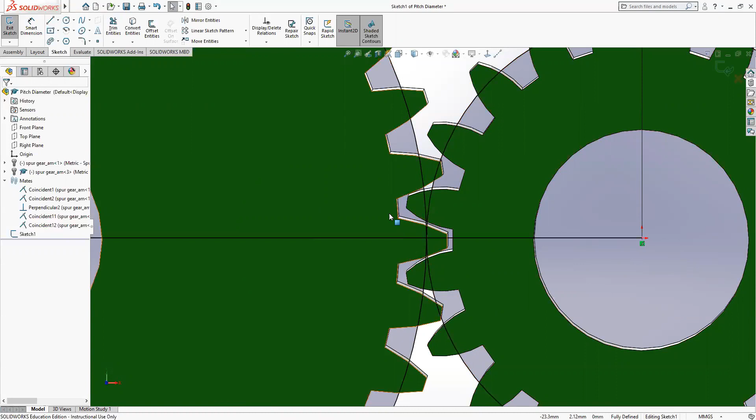And if you zoom in here, you can see that these two circles are tangent to each other. And you could also see that as the gear was spinning, the tip of your gear never impacts the root of the other gear. There's always a space in here, and basically this lets the gears spin without binding.

So when I say module and tooth number, we'll get out of this edit sketch, back out of here, and we can right click on this little gear and go to the edit toolbox component. I've already brought these gears in from the toolbox. Remember, you can go to toolbox, we're dealing with metric, so you go to the metric drop down under power transmission and then gears. That's where you can bring in your gears.

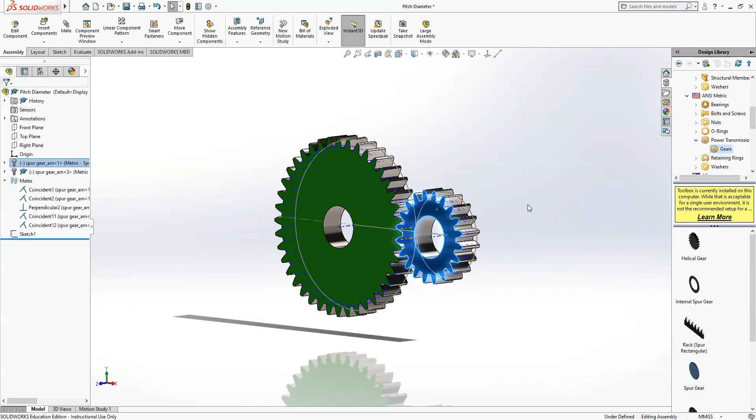And these are basic spur gears. That means that the tooth pattern has no angle that the tooth is rotated at or anything like that. They're coming straight out, 90-degree angle out from the body of the gear. If we spin around here, you can see there's no weird pitch to them this way or anything. They're a standard spur gear that comes out from the center and radiates all the way around.

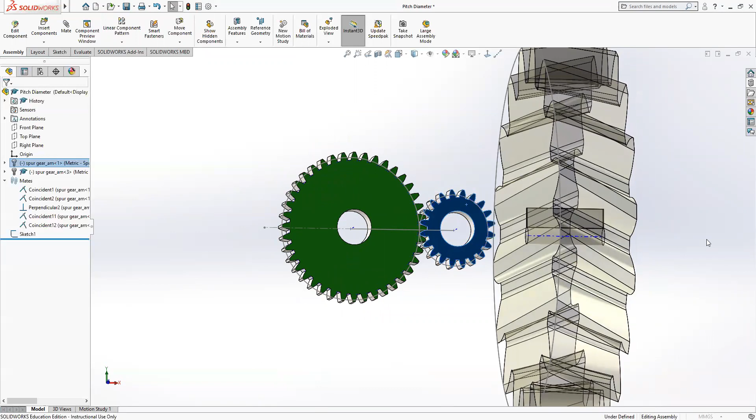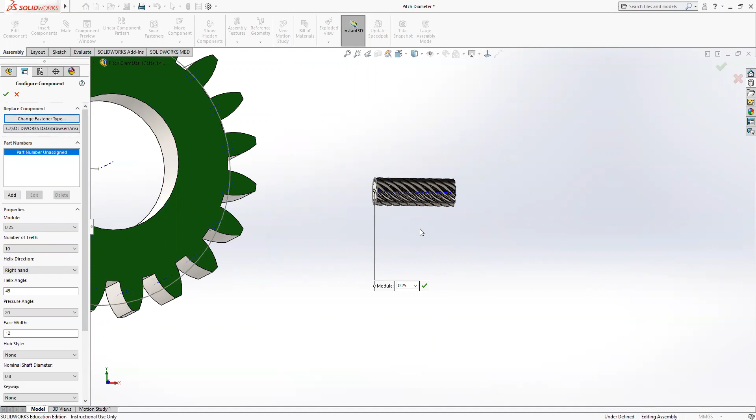When I say it might have some sort of weird pitch to it, let me just pull in a helical gear real quick so you can see it. We'll zoom out, let me click off of it, we'll zoom in on it. You can see a helical gear, the teeth are spiraled around the shaft. That's what I meant by a helical gear. That's kind of a different beast, though it still has a similar setup when you're matching it with other types of gears. You want to make sure your module is the same.

So anyway, we'll exit out of that, go back to this. We're going to look at just these basic spur gears for right now. We'll go normal to our front plane. All right, so we've got the small spur gear here.

So if I right click on this and edit the toolbox component, because we already brought it in, right? In here, this is a screen that you would see if you brought in a brand new spur gear. And to come in, it would have what the part is, and then you would have some properties here. The first property is the module.

And like I said, that's the value that if you multiply it times the number of teeth, it's going to give you your diameter for your pitch, right? So if we go in here, we can change some of this, and you can see what happens. Say we go to that, you can see we went to 2.5.

So now we're 2.5 times the 20 teeth, and our gear got bigger, right? And you can also see, if you were to imagine these meshed up, this tooth isn't going to fit in between these teeth very well. If I was to go and make this gear a module 2.5, then the teeth would mesh, but we'd have to change the distance between our centers, because we have 20 teeth here at 2.5.

That gives us, for our overall diameter, it's going to be 50 then, right? Because 2.5 times 20 is going to be 50. So, which means if we were to do the same thing to this one, then we'd have to increase this distance from our center point to our center point.

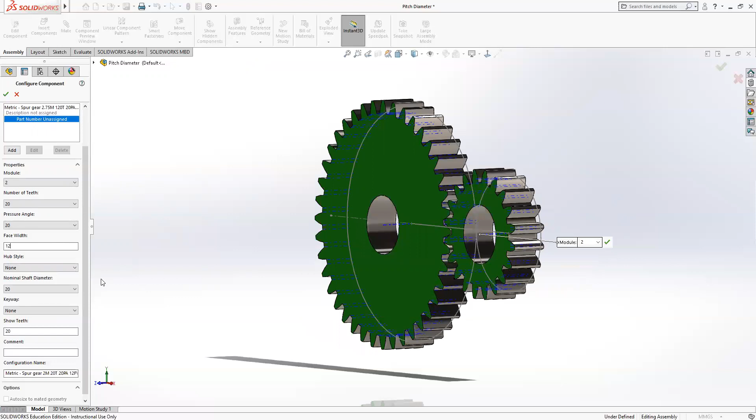And then we'll spin it around flat so you can see again. You have your shaft diameter, so that's the shaft that's going to go into the inside of the gear. Currently it's 20. Let's go a little smaller since this is a small gear anyway. Let's go 15. You see that made that shaft smaller. So it's 15 millimeters for the diameter of the shaft.

Let's go back to 20, and just keep everything kind of the same as what it was. And then you have the option of putting a keyway in here. A keyway is a way that you can lock that gear to a shaft.

So here's a square keyway. You can imagine that the shaft would come through and would have a similar notch in it, and you would have a piece of metal that fit into both those notches to lock it. Or the shaft would actually have this keyway as an integral part of that shaft. So it would be round all the way around, and then it would have this square part that's stuck out of it. And when the gear slipped onto that shaft, that would keep the gear from spinning free on the shaft. It would hold it in place.

For right now, we're going to just go back to none as well. Okay, and then the final thing that we can look at is you might not have a gear that needs to be around. You may only need 10 teeth on that gear. And of course, it flipped it that way because why not?

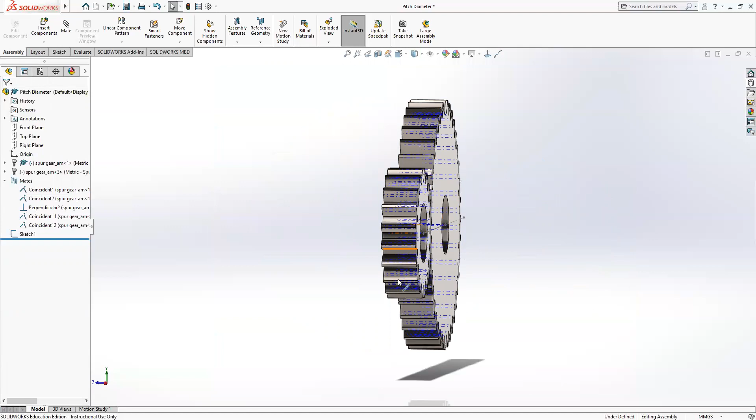And then I did the same thing with the big gear, I took the face of the big gear and mated it to the front plane. That made them so they both line up flat together along with the front plane. You can see the front plane there.

I drew in a line that was the distance that I wanted between the two center points. And I did a coincident with the center axle or the center axis of the small gear. This happens to be the origin, but it's one point at the end of the line.

And I did the same thing with this one, where I have the center axis and the end point of that line. That keeps it so even though it's flat on that front plane, it can't go up and down or left and right. It stays where it's at.

This perpendicular one is actually not necessary. I was messing around with a few things, and this one we can go in and delete it. It does not actually do anything anymore.

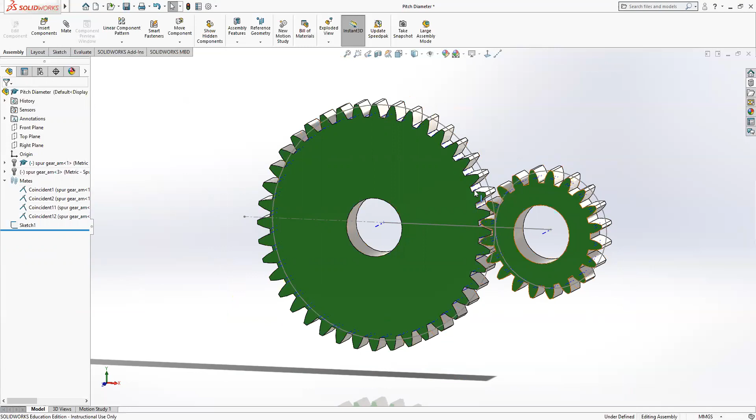It makes it overdefined. So basically with those 4 mates, and those are just general mates, we're able to align these gears and get them set up in a position where they're in the right relationship to each other.

Now the one thing you want to make sure before you do this next step is you want to zoom in here and go normal to our front plane, so we're looking at everything straight on. You want to make sure that the gears aren't overlapped with each other at all.

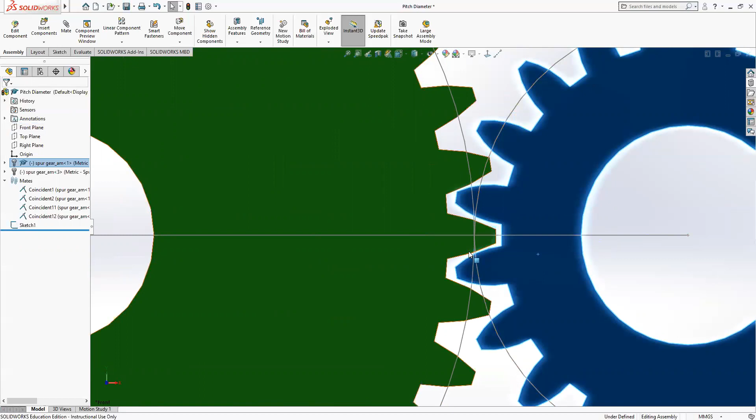So say in this case, if it looked like that, you'd want to come down here and spin it so that they weren't touching each other. All right, so we'll click off of that. We want to go to assembly and we want to do a mate.

Now what we want to do is go down to these mechanical mates. In the mechanical mates, we have a few things: cams, slots, hinges, gears, which we're going to use, rack and pinion, which is basically a different setup of gear — it takes a circular motion and turns it into a linear motion — screws, and a universal joint.

So we're going to do a gear mate here. What you want to do is spin across here. You want to choose the inside of your gear, and the inside of our gear.

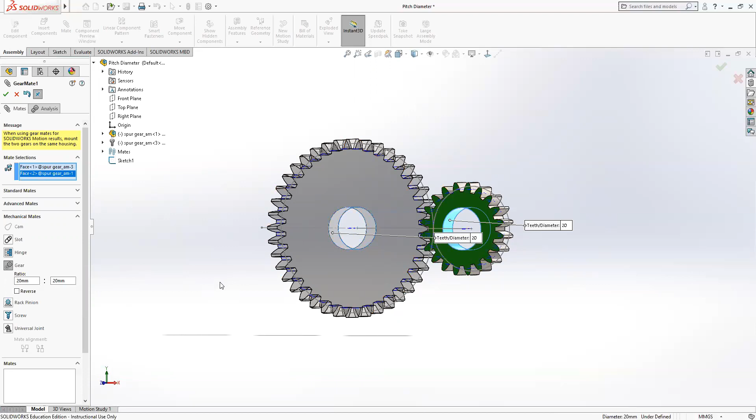All right, and it's asking for a gear ratio. So we chose our big one first, so that's going to be the first number here. And then this other one is our small one, right?

So what we want to do is it's either got your teeth or your diameter. We know that we have 40 teeth on here, right? We also know that our pitch diameter, you can use pitch diameter as well — basically, as long as the ratio is correct, this will work. So our pitch diameter is 80, and our pitch diameter on this one was 40, right?

Because we're module 2, we have 20 teeth and 40 teeth, so let's just go with that. We'll put it in here, we'll put 80, and then this one we'll put 40. And we'll say enter. All right.

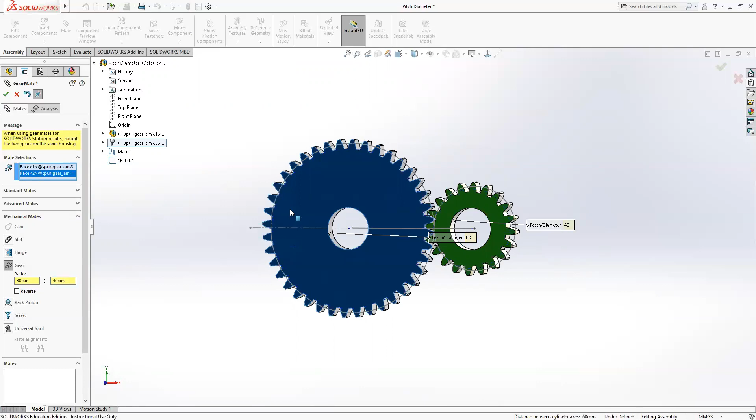And we should be good there. So we can spin it a little bit and see how it looks before we get out of the mate. That looks good, all right. So then we say okay, and we say okay again.

So if we go normal to the front plane again, we can look at this, and here we go. As this spins, you can see that your gear's tooth never impacts the far end of the root. And as it moves across, it pushes the other gear down.

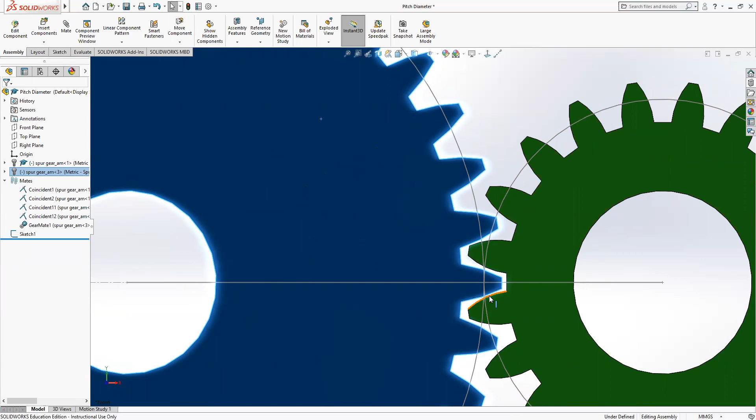And if you wanted this to be just a little bit more detailed when you were doing this assembly, you could have slid them up so that these two lines were just barely touching. Because right now, as I spin this gear—hold on a second—but as I spin these gears, you can see that there's a little bit of an air gap in there.

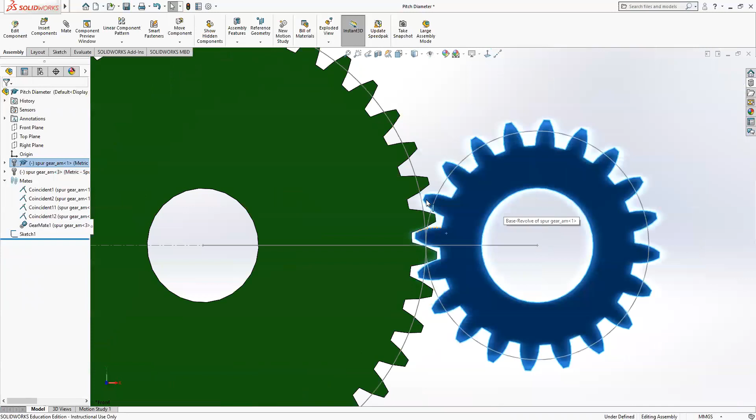And that just happens to be the way these gears lined up when I set them. It's not necessarily imitating a mechanical feature where you have a contact point there. You just set it up as two gears and gave them the ratio, so they know that if this gear spins at a certain speed, this gear is going to have to spin at twice that speed.

Same thing if you were going the other way—if you were putting the motor to this one, it would spin at, say, 1 revolution per 10 seconds. This bigger gear would spin at half a revolution per 10 seconds. So that's how you set that up.

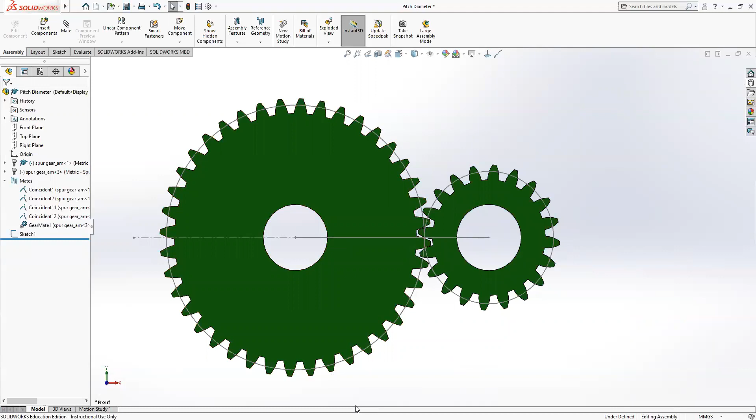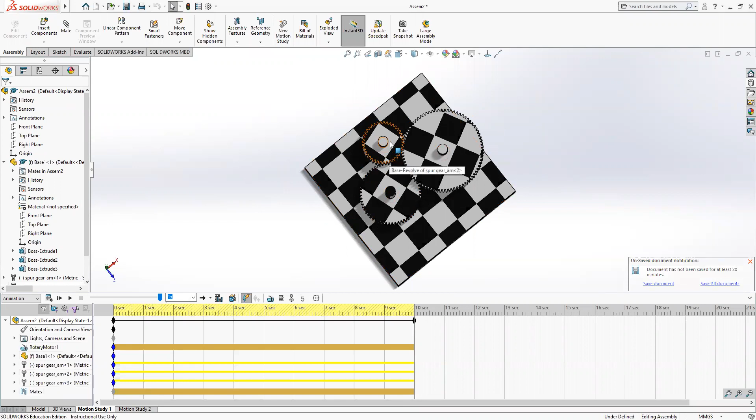And I have another diagram here that I can show you guys, another model that kind of explains that. So if you look at this, we'll go to the first motion study I set up. This is not 100% what I wanted—I had some different textures on here. Hold on a second and I'll put those back.

Okay, so I went in and changed some of the textures here. The checker pattern made it kind of hard to see, so I adjusted that, and then when I clicked back on something it had actually pulled those off. So we have a little bit of different texture here now, so you can visualize the spinning.

So in this motion study 1, what I did is set a motor up, and you can see here, if I go to the rotary motor and click on it, we can go to edit feature. It's a rotary motor, it's got a speed of 10 rotations per minute, and it's applied to this little gear, okay?

So if we go in here and click play, you can see that we have this gear spinning at 10 rotations per minute. Let me actually expand the time out up to, maybe, 12 seconds. All right, so you can see it's spinning—a little choppy here because it's doing its progression.

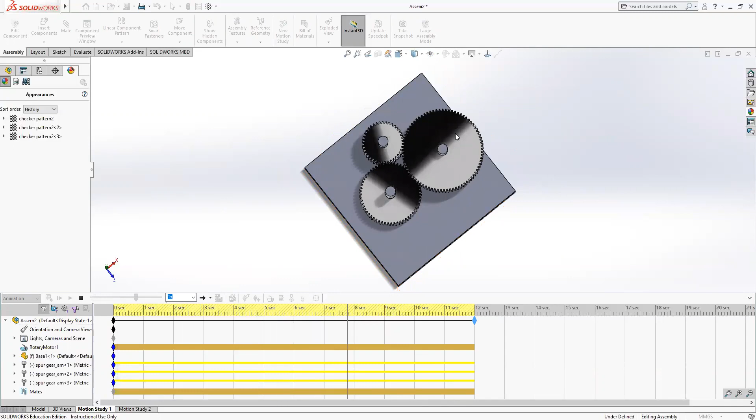If we play it from the beginning now—all right, so we're spinning relatively slow here, right? 10 rotations per minute. But over here on this gear, it's spinning even slower, and this medium-sized gear spins a little bit faster than the big gear. I'll play that again one last time.

All right, and this is what I was talking about, where your ratio here—for every time this one spins, it spins this other one a certain other percentage. And we can go in here and look at this little gear.

If we go into edit toolbox component, we see that it's a module 2—they're all going to be module 2. It has 40 teeth, okay?

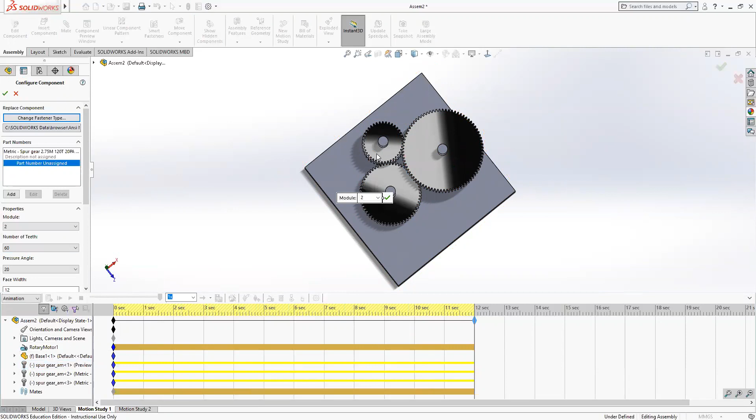This medium-sized gear—we'll go in here and look, it's got 60 teeth, so it's 1.5 times the smaller gear, right? And then our large gear has got 80 teeth.

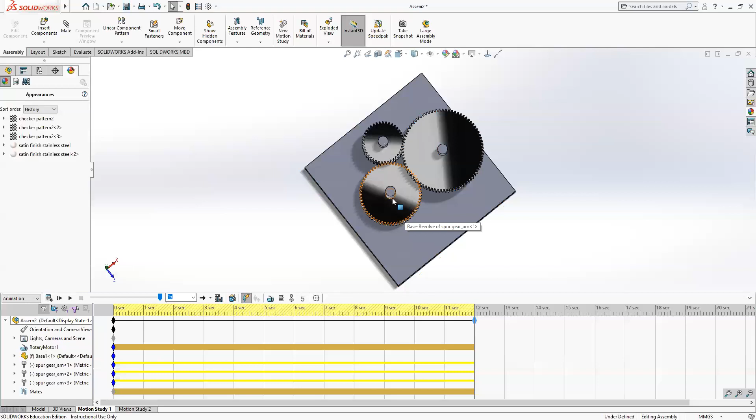So let's watch that one again, and you can see this—this gear is going a little faster, this one's going pretty slow, right? And you can see by paying attention to the line.

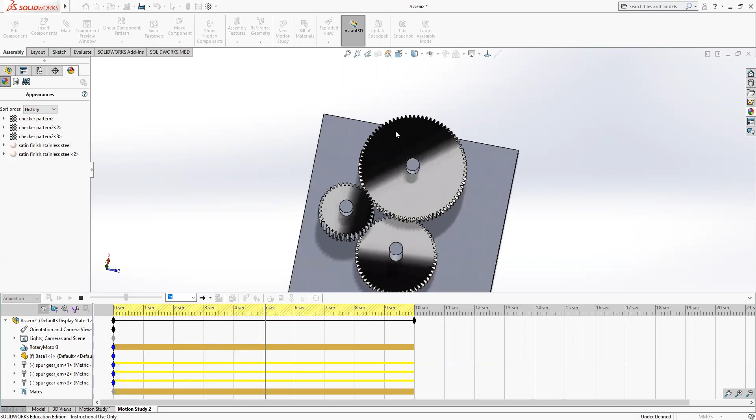All right, so in the second motion study, what I did, let's zoom in a little bit here so we can see it and get a better perspective. As soon as I click play it's going to zoom all the way out again, but we'll zoom back in. You can see here that instead of putting the motor on this little gear, I put it on this big gear.

So now this big gear, if we look at our motor features, has a motor driving it at 10 rotations per minute. But now, for every rotation of this gear, we're getting 2 rotations of this gear, and 1 1/3 rotations of this medium-sized gear.

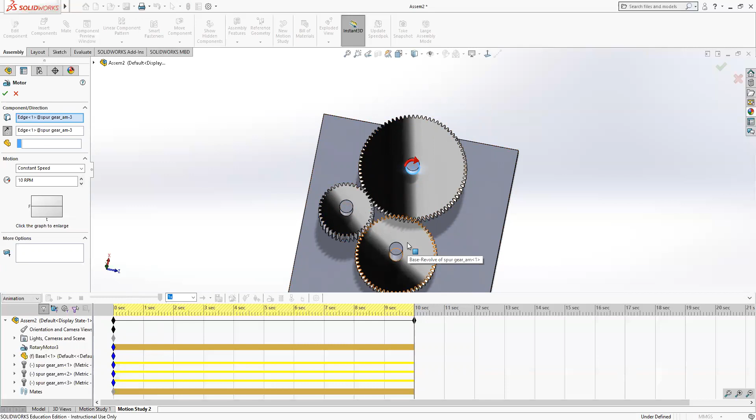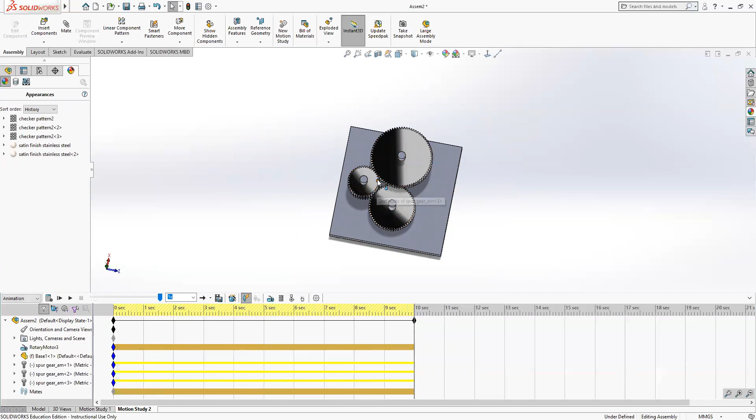So watch that again. When you're setting these things up, if you're going for an end result, you need to make sure you get your gear rotations correct when doing your gear mating. But also, when driving these systems, if you want a certain speed, you need to make sure your speed association in the motion study is tied to the correct gear, because that changes how all your other speeds relate.

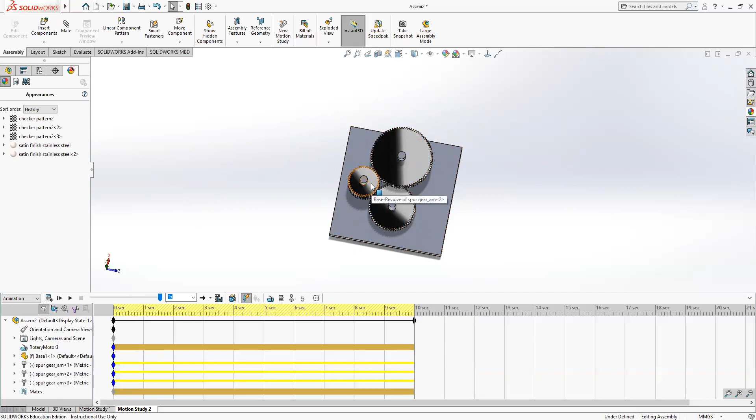So when we do the homework for this, I'm going to have you guys set up a few gears onto a plate. As you saw in the first example, you don't need a whole plate for this—you just need something to give the gears a rotational relationship to each other, so that when you spin them, they don't go all wonky on you.

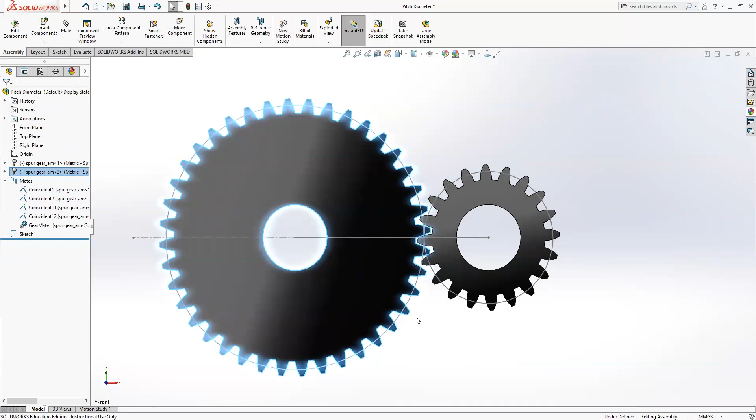Because if you didn't do that, the gears would start to—as you spun them, especially by hand—once set up in the motion study, it'd be different. But when you're spinning them by hand, when they're free floating, if they don't have any relationship to each other, they'd get out of alignment. So by doing your mates, mating them to the same plane and getting the relationship correct, you don't have to worry about that as much. Then you don't have that same problem.

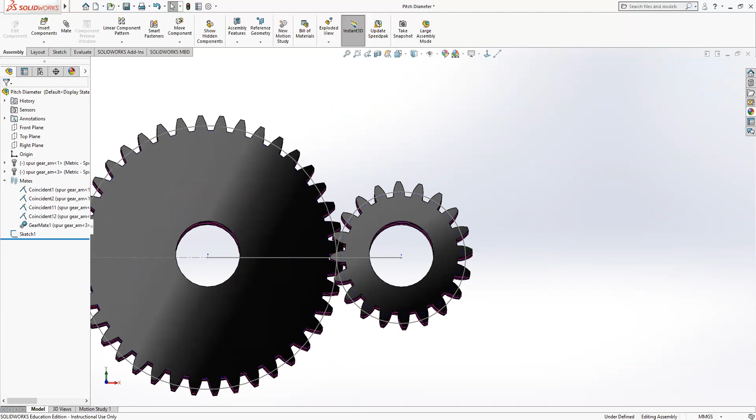This is just a hypothetical. If you were putting something into an assembly, this plate would be something you'd potentially have in that assembly, and each one of these pins would carry these gears.

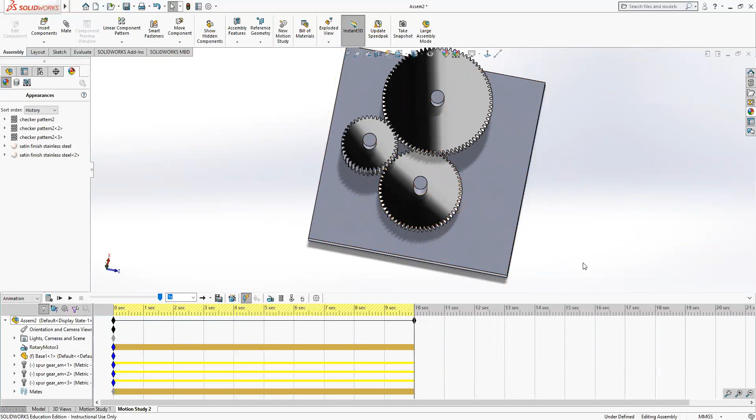I'll have you set up something—I'll probably have you make a plate. Keep in mind, when doing this, I won't give you all the values. I might tell you what your module for your gears needs to be but not how many teeth you need, and instead give you the distance from this point to this point. Or I might do it the other way around, telling you how many teeth you have but not the distance. So you'll have to think about that when doing the assignment and figure out how to fix it so those distances are correct, so you have your pitch diameter correctly.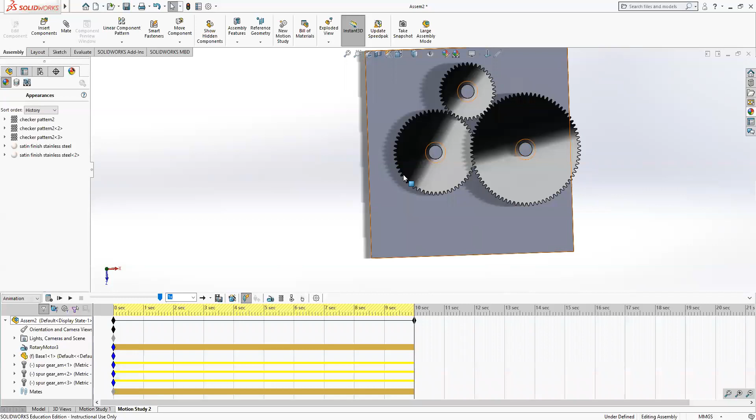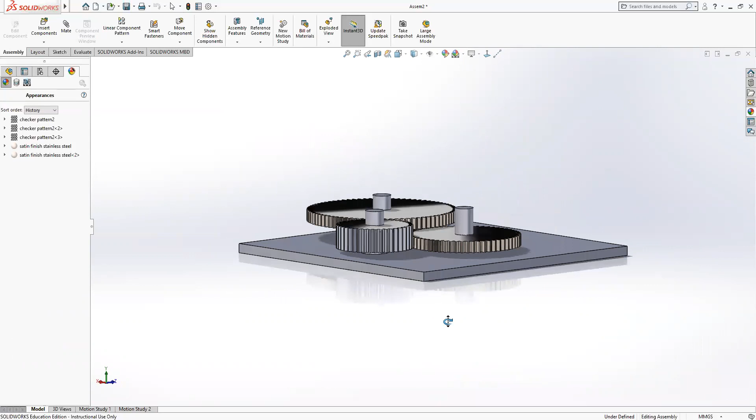Do you remember when I said I messed around a little with the gear width to make this part work? The way I did that—if you look at this from the side—I actually stacked my gears. This gear with 60 teeth sits below the gear with 80 teeth, and both are connected to this gear with 40 teeth. To do that, I made the 40-tooth gear twice as wide, so you have contact along both points.

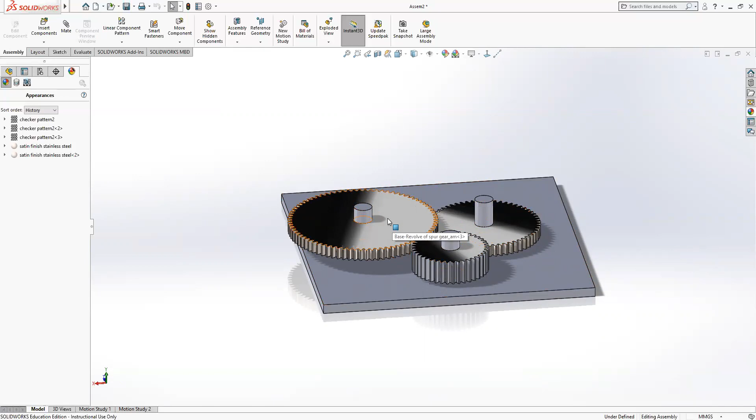If you're driving this gear, it's just going to drive both of them. But say this gear is driven instead, then it drives this one, and this one drives that one. That's one way to do that. In some cases you may see gears stacked on top of each other, connected, with a smaller gear inside and another gear sitting on top that contacts that smaller gear. Every rotation here gives less rotation on the little one, giving a different rotation to the other gear. That's how you'd make a speed reducer or a speed-increasing gear set.

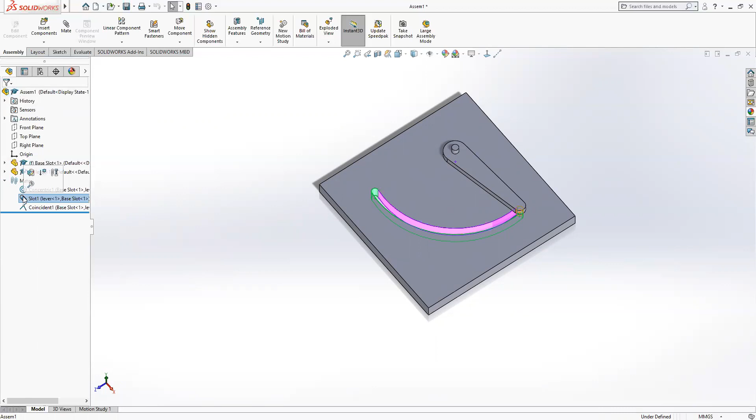This is two pieces. Remember when we had the mechanical mates, one of the mate options is slot. In slot, you can choose two faces: the face of the slot and the face of a pin that rides in that slot.

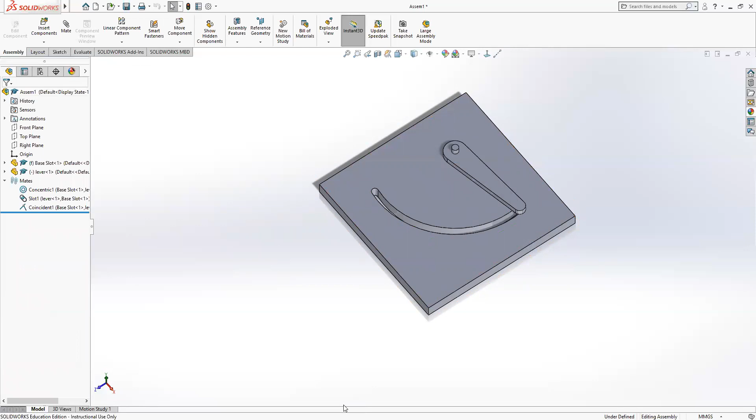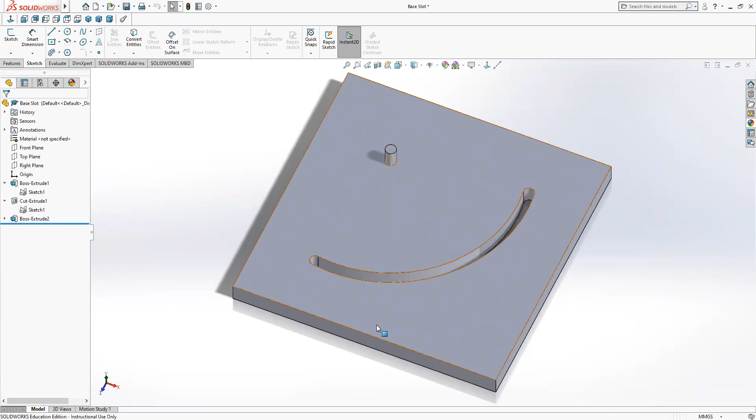Let me show you what the two pieces look like. They're pretty simple: just this plate with a pin that comes up and a slot cut into it. This pin is set at the center of the circle, basically the rotational point for the slot cut into the plate. My other part is a lever, which has a hole in it the same diameter as that pin, and a pin on it the same diameter as the slot.

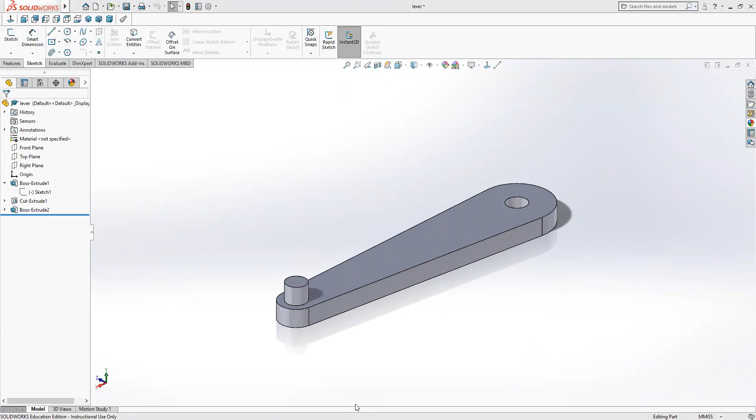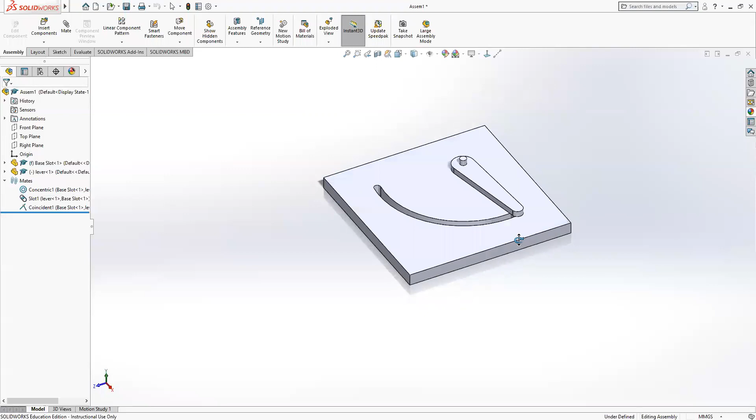The distance between these two is from the center of the slot to the center of the pin on the other piece. When you combine all those together, we did a few mates: a concentric mate with this pin and the center hole of the lever, so they line up perfectly, and a mate where the bottom of the lever meets the surface of the plate so they come down and touch each other.

Then I did a slot mate, which mates this slot that we cut. If I zoom in, you can see it here. The slot mate is a mate of this slot with the face of that pin.

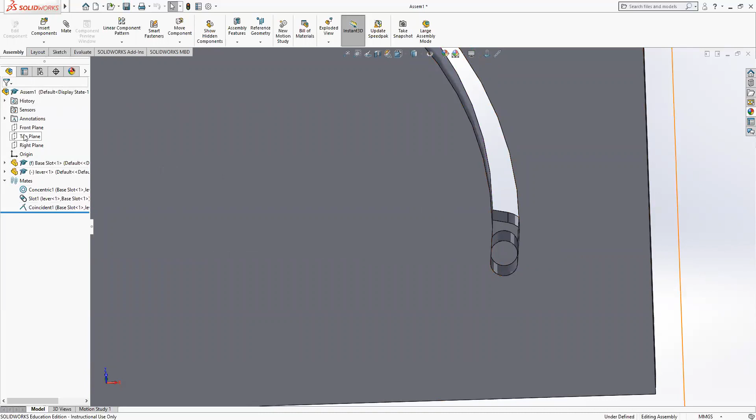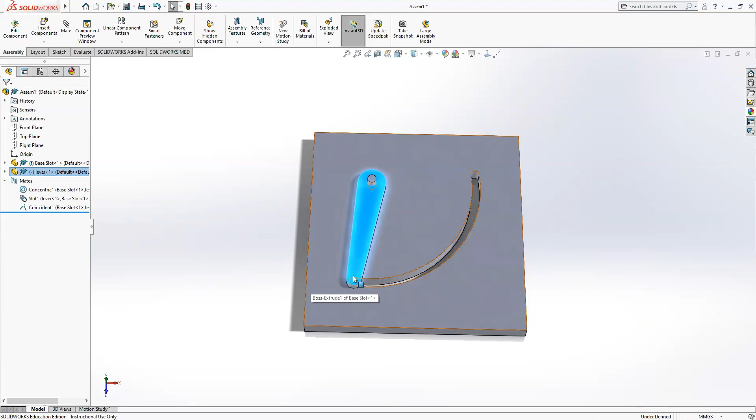Going back to the top plane and normal to that, this allows us to see it from our perspective so it looks right. We can take this lever, and it rides in that slot. But if you didn't have that slot mate, just the concentric and coincidence mates, you could rotate this all the way around—the program wouldn't recognize that the pin is hitting the plate at all. Because we put in that mate, it knows the pin needs to stay in that slot.

This would have been another mate option for assignment 4, when you did the dovetail that slid into the slot. If we had done a slot mate there, when you slid your dovetail all the way back, once it hit the back side of the slot, it would stop. We just weren't there yet, so we didn't add that in as a mate. So this is a slot mate.

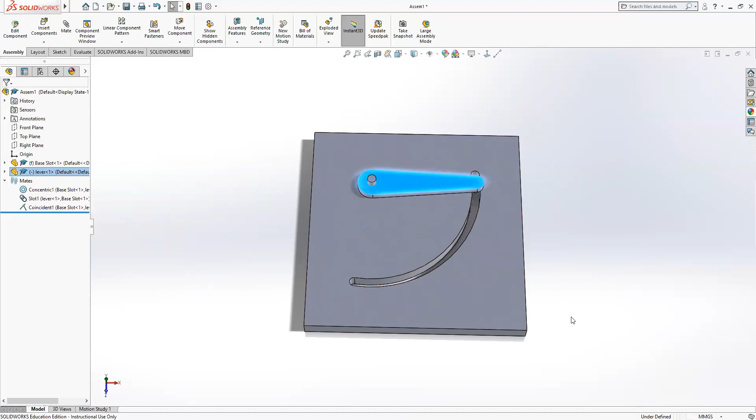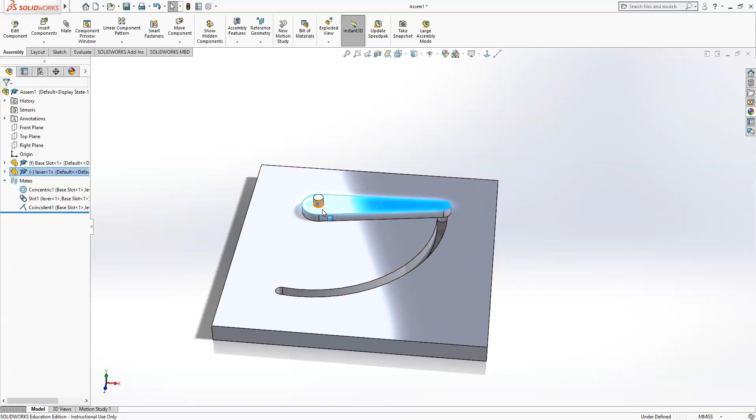I'll talk about that more in class, and how you can use it. You can imagine how this would be useful—think about components in tools around the house, like a speed selector that needs to ride inside a slot, and perhaps there's a gear that affects something else in the machine.